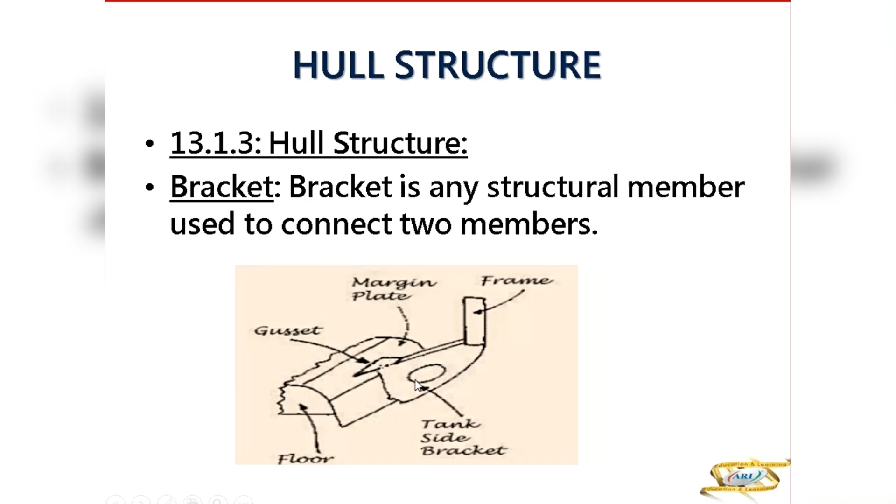Good afternoon, sir. So bracket we have seen, bracket was connecting to frame, so any structural member used to connect two members. Here you had a margin plate, I showed you the yellow one connected to the floor. Here you have your tank side bracket, which is connected to frame. Then you have frames - we have seen on the side, the web frame was the yellow one, the red one was the frame, the bracket, the shell plating, the beam knee here.

Frames are like ribs bolted or welded to the keel to support the hull and give the ship strength and shape. So the frame resists water pressure stress because the water pressure stress is from outside, onto the hull plating. If there was no frame, the inner structure of the ship would not be protected from water pressure.

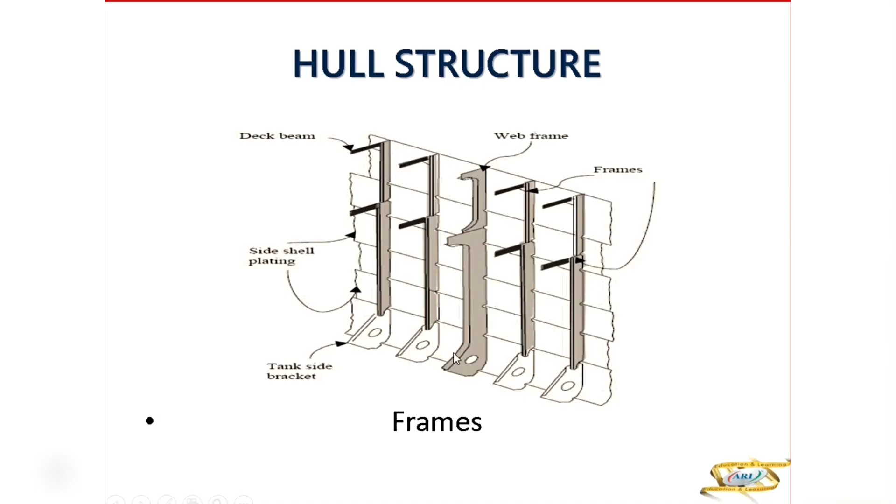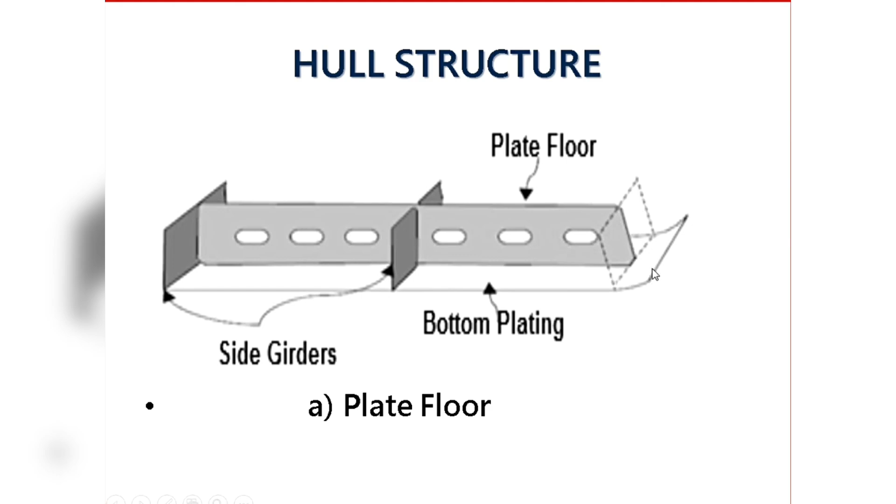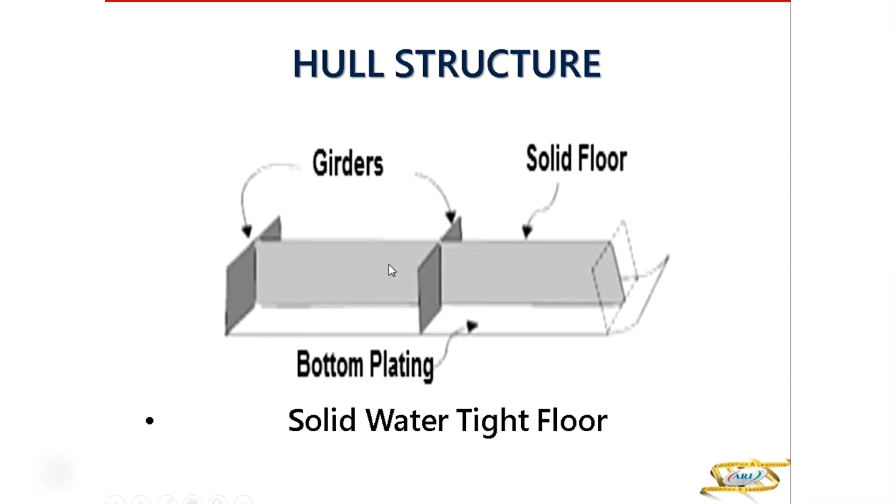We have floors. The floors we have seen - this was the plate floor with the holes, this was the center girder and this intercostal side girder. This is the margin plate, this is the bilge plating, this is the bottom plating. This is solid plate floor. This is the red one we have seen, which is a watertight plate floor. This is centerline girder, intercostal side girder, margin plate, bilge plate. This is between the tank boundaries, DB tank boundaries. The bottom plating here, the bracket floor.

In the video, we had not seen this frame. At the centerline, there was a bracket here, and on this side there was a bracket here. Both are connected by a framing, the frame bars, top and bottom. So this is your intercostal side girder, and there is a stiffener here. In between the frame bars, you have like an angle strut. I'll show you later. Here the plate is bent 90 degrees, that is flanging. The bracket floor is bent at 90 degrees here to take the load of your tank top, providing additional strength.

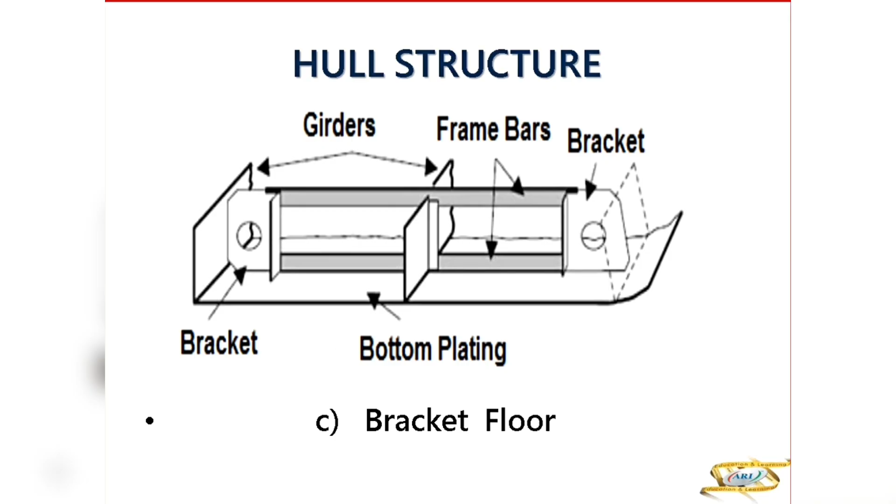Flanging - if you are bending it, why not welding it? Because if you weld it, it can break. By bending it, the strength will remain. That's why we bend it at 90 degrees.

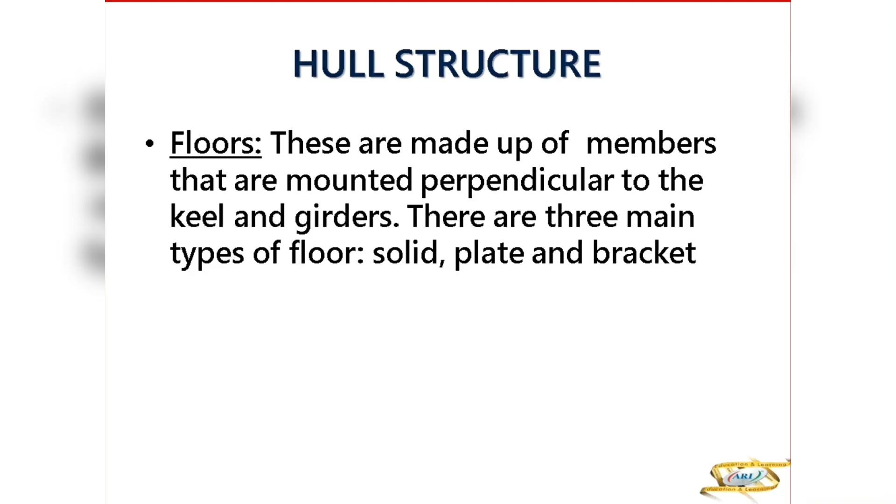So floors are members mounted perpendicular to the keel and girder, located in the double bottom tank. You have three types: solid floor, plate floor, and bracket floor. Solid floor is between two DB tanks. Solid plate floor is in the DB tank - watertight plate floor, so mark it solid, watertight. So the types of plate floor will be solid watertight, solid non-watertight, and bracket floor. Solid watertight will be between the tanks, the DB tanks. Non-watertight will be inside one DB tank, the ones with the holes. The bracket floors are in between the solid plate floors.

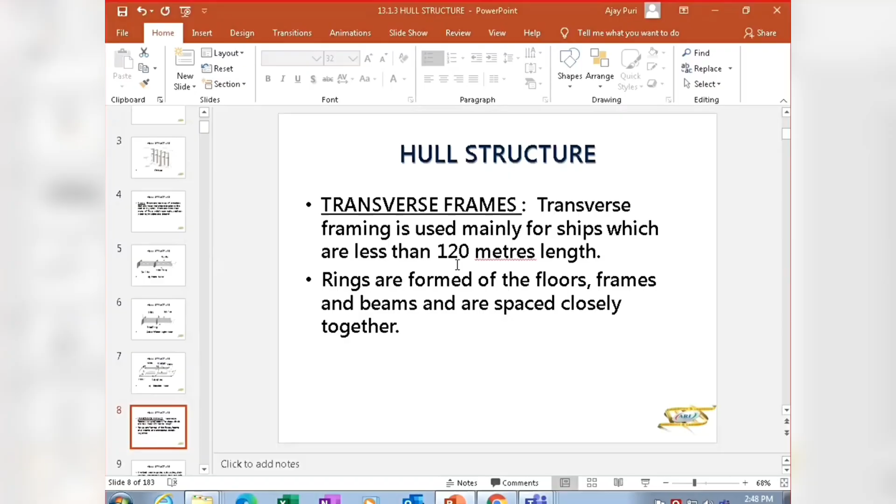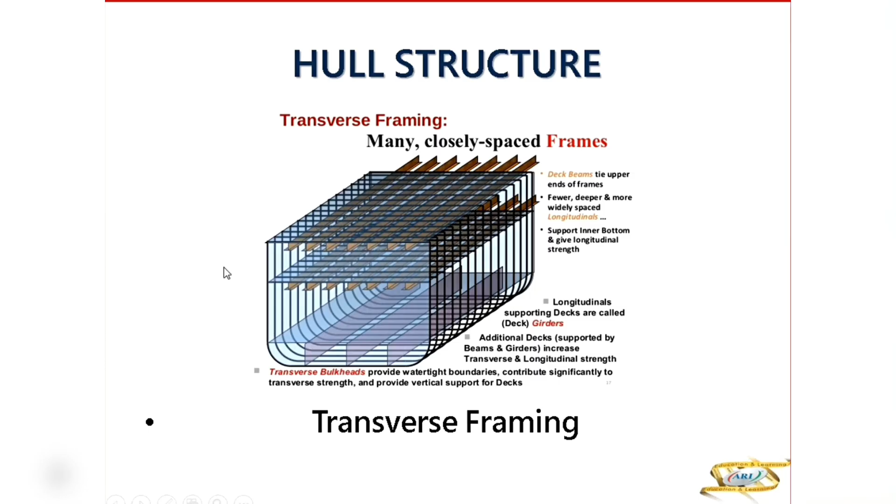First we will see what is transverse framing. Transverse framing is used on small ships which are less than 120 meters. Let me show you other diagrams also of this. Now this ship is transversely framed because you don't find longitudinals - you have girders, but no longitudinals. So these are tween deck girders, bottom girders. These are your frames connected to each other here. This is a bottom transverse, deck transverse.

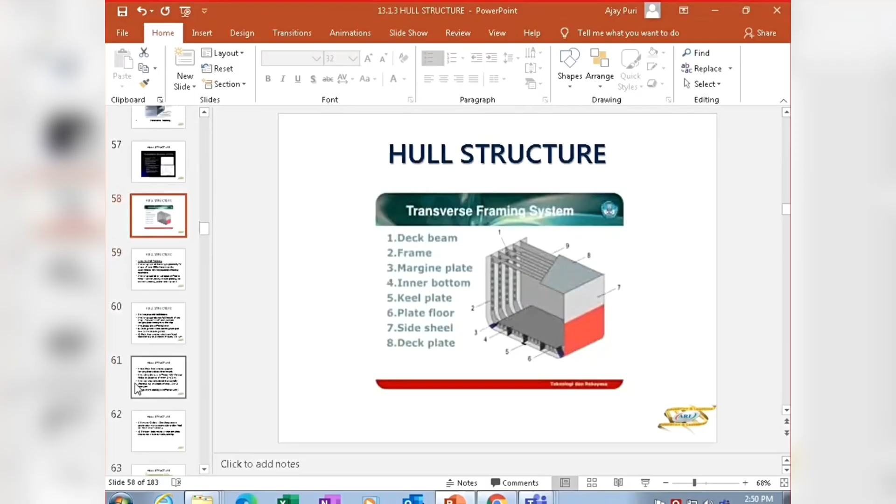So this is the transverse framing without longitudinals. We'll do that in detail afterwards. So this is your transverse framing - we'll be covering it in detail later. Right now we're just doing the definition, then we'll do the detail of transverse framing.

In this diagram, if you see, this is transversely framed - no longitudinals. There's beams here, tween deck beams, and then you have floors here and the girder, no longitudinal. This plating on the side is the stringer plate - if you can see the arrow, this is the stringer plate. We'll come to the definition later. So transverse framing is usually used on ships less than 120 meters in length. Rings are formed of the floor, frames and beams, and they are spaced closely together, all connected like a ring as I've shown you.

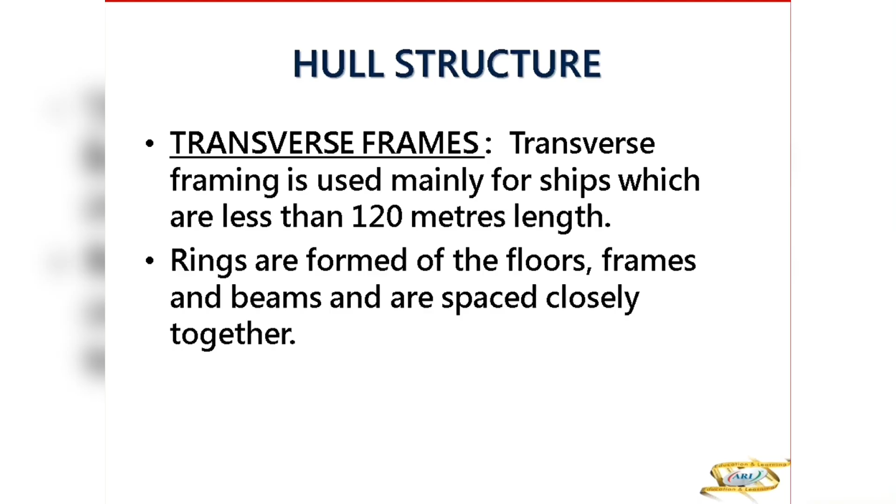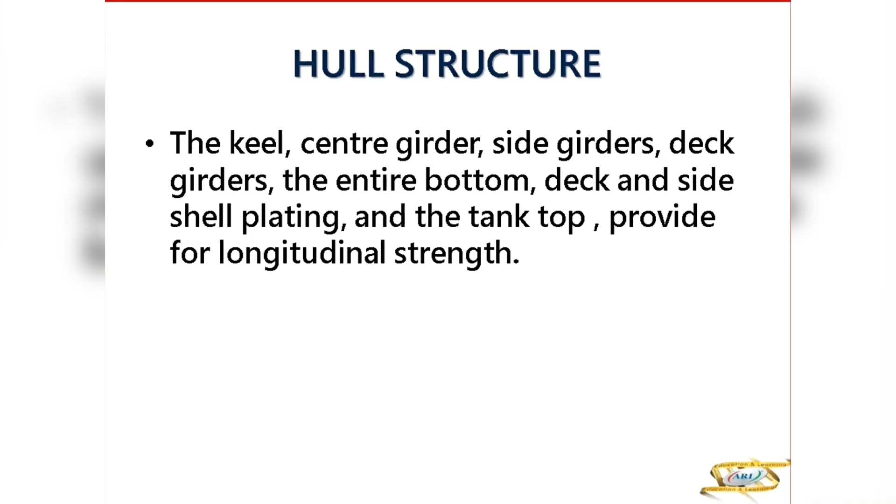That your deck transverse, bottom transverse, frame, everything is connected like a ring. Now the longitudinal strength is provided by the keel, the center girder, side girder, deck girder, entire bottom, deck and side plating, tank top. But you don't have longitudinals providing the longitudinal strength.

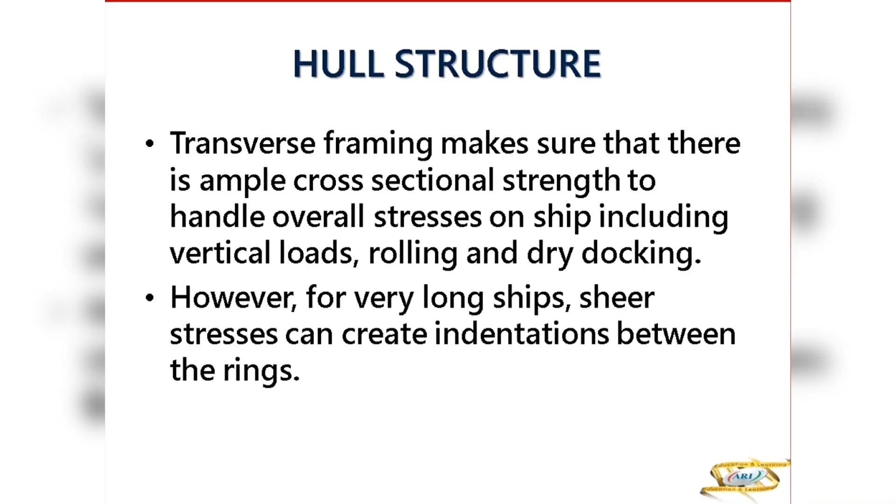Now the thing is, these are not very long, these are small ships, so they can take the vertical load, rolling and dry docking stresses. But if your ship is very long, then you can have indentation between rings. Indentation means the plating will go inside, it will make a dent. So you can't afford to have dents on the ship if your ship is too long. So you can't have transverse framing on long ships. Below 120 meters you can have that, but beyond that length you can't have transverse framing.

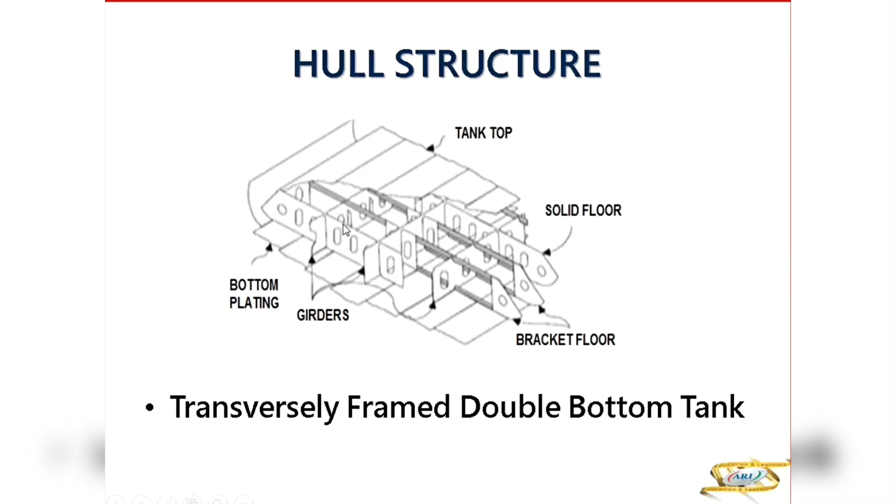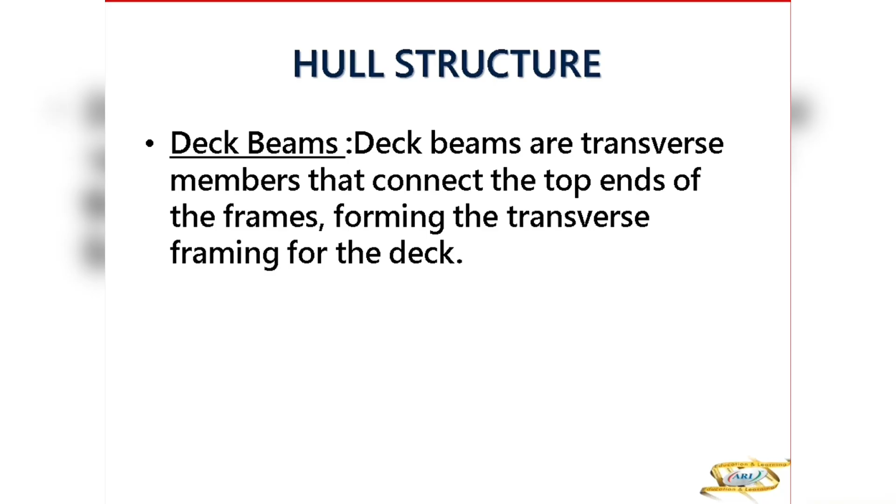Now we come to deck beams. So deck beams we have seen in the video. They are transverse members that are connecting the top ends of the frame, forming the transverse framing of the deck. So deck beams are supporting the deck plating. So these are thwartship members which connect to your frames on both sides, and you have a beam knee connection between the beam, deck beam, and the frame. So that is your deck beam which are going athwartships.

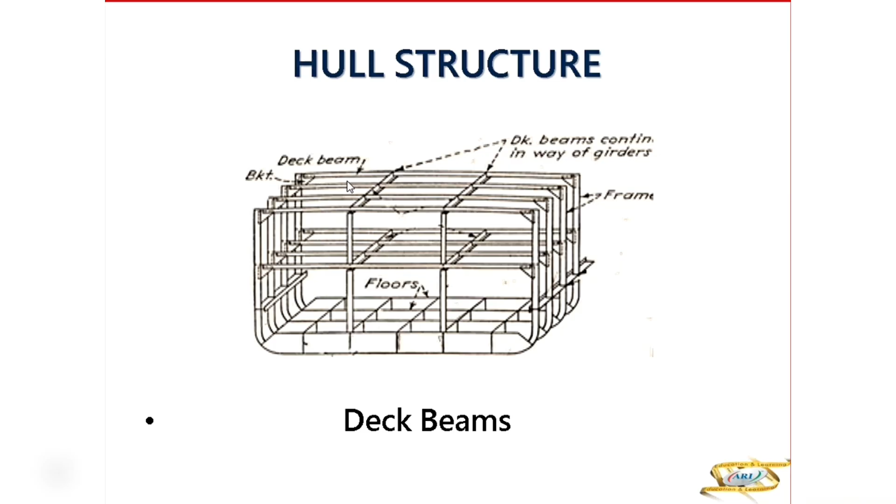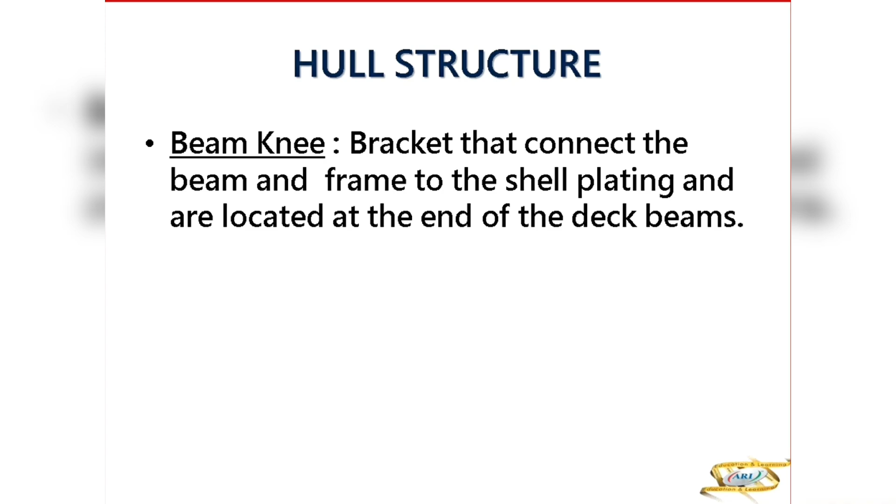Now we'll come to beam knee. This we have studied earlier in the stresses. So beam knee are connected between the beam and the frame, and they compensate for your racking stress. So it is actually a bracket, but there the position of this bracket is known as beam knee. So it is a bracket that connects your beam and frame to the shell plating and is located at the end of deck beams. So this is your beam knee.

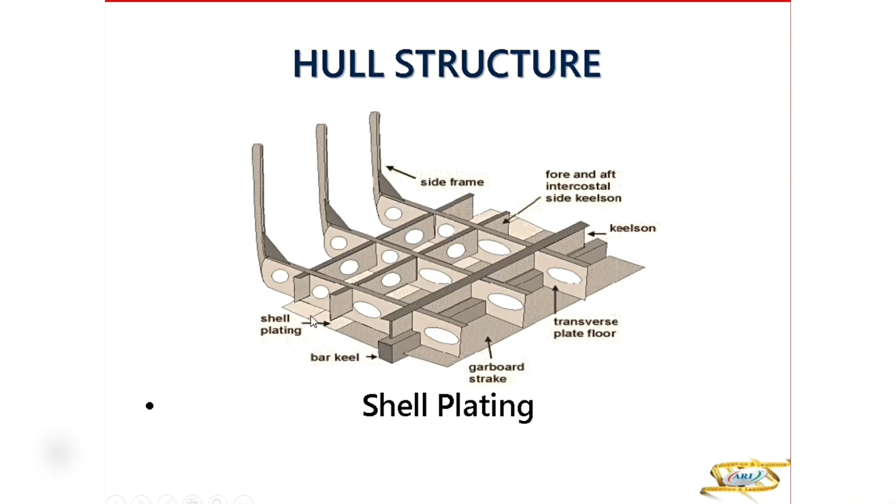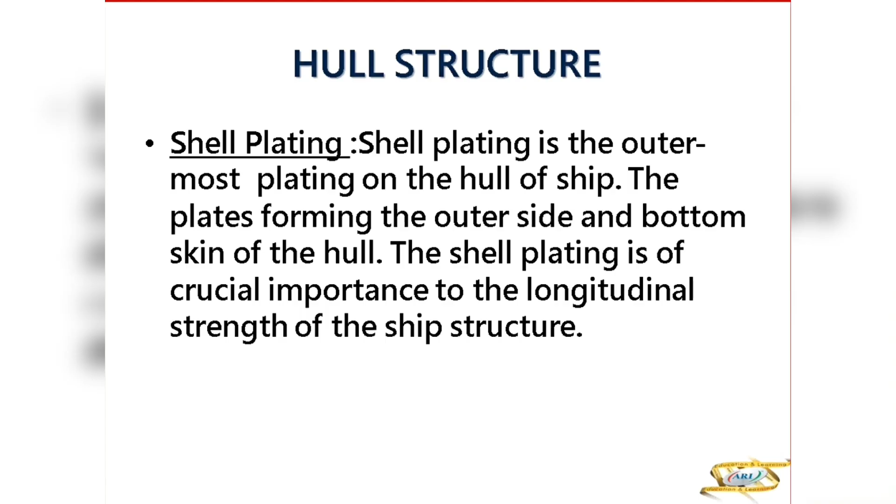So the plate outside is known as shell plating. The plate will be outside your frame also. So shell plating or hull plating is the outermost plating of the hull of the ship. They form the outer skin and the bottom skin of the hull. It is crucial for the longitudinal strength of the ship's structure.

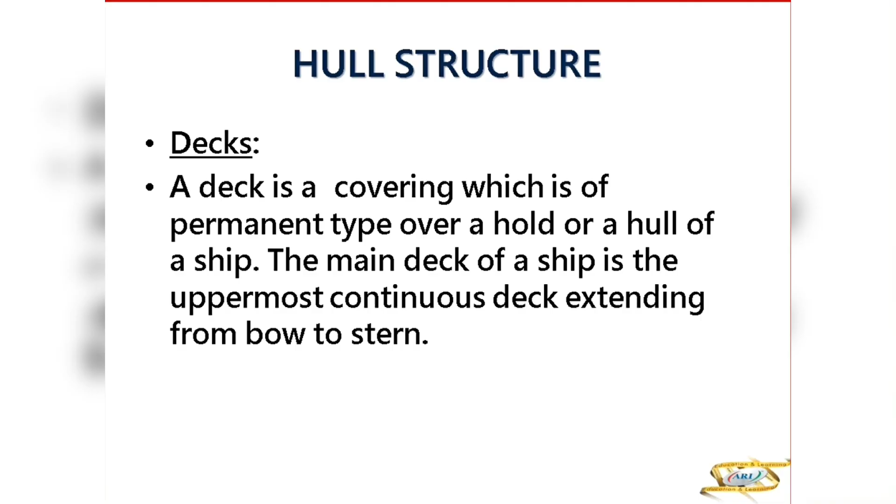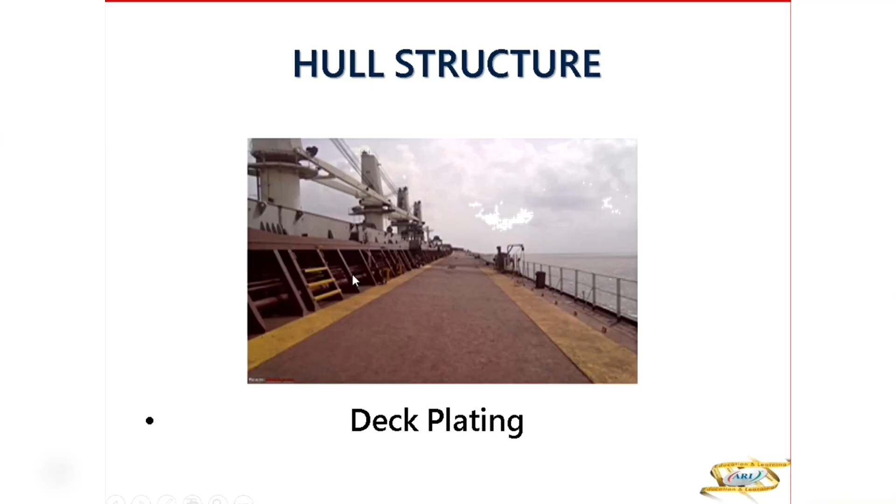Now we come to deck. You know about it, so we'll come to the definitions. Covering which is permanent type over a hold or hull. Main deck is uppermost continuous deck extending from bow to stern. So this is your main deck. This is a bulk carrier which has the hatches here, and the hatch coamings are here which support the hatch cover, and the coamings are supported by these structures, the supports here. These are your cranes with the grabs for discharging bulk cargo.

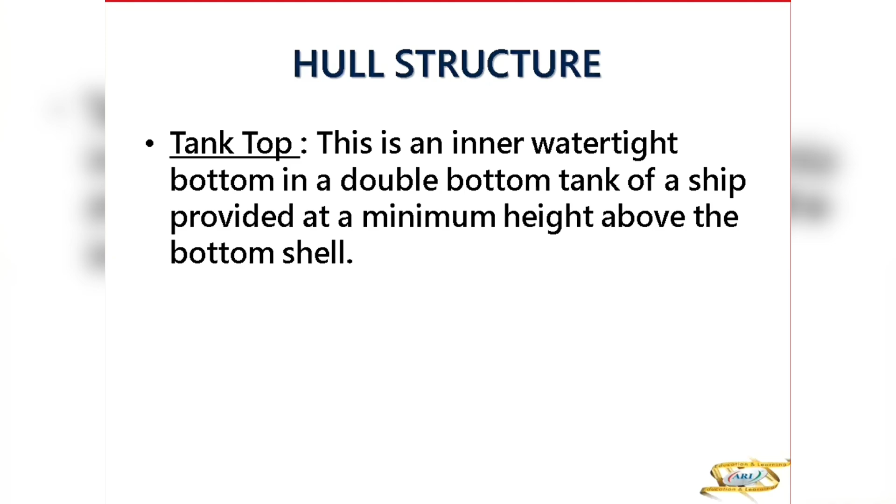Now we come to the stringer. Now this is a double hull VLCC. This is the double hull here, double bottom, centerline girder. And the stiffeners here for the transverse bulkhead, and then you have stringer plates here. Plates where you can stand as a platform. It's not for a platform purpose, but this is providing strength.

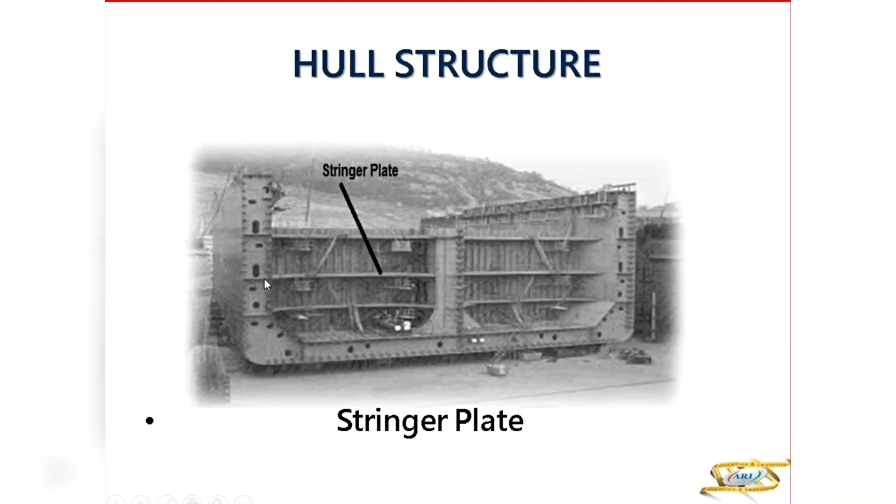When it is across, port to starboard, it is giving transverse strength. When it is going fore and aft, like this one in your passageway, in the double hull, there it is providing longitudinal strength. So here in the passageway in the double hull, it is providing longitudinal strength, but on your bulkhead, transverse bulkhead, it is giving transverse strength. Here it is giving longitudinal strength. So it is a longitudinal structure plate. If it is giving longitudinal strength, then it is a longitudinal structure plate which strengthens the hull of a vessel.

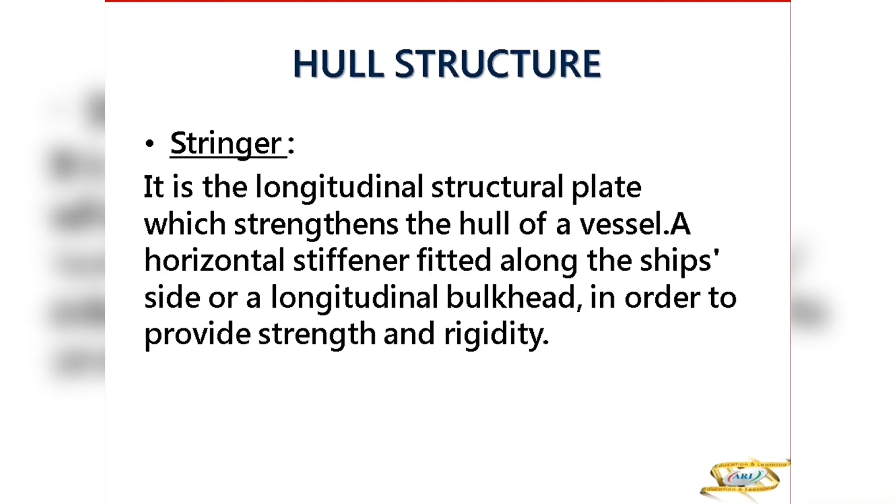A horizontal stiffener fitted along the ship's side or longitudinal bulkhead to provide strength and rigidity is a stringer plate. Now to explain, I'll show you again how the stringer is there.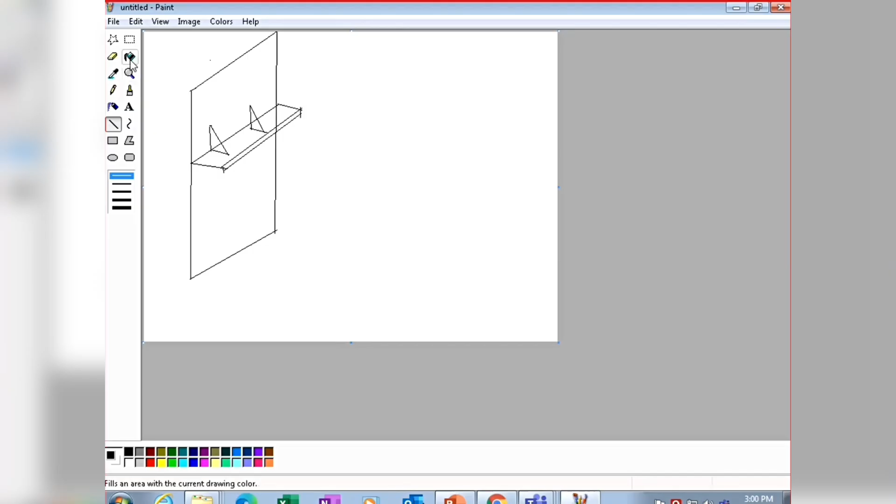So if I mark it out, what is the stringer plate? I'll mark it with color first. Suppose this is your longitudinal bulkhead. Now I'll come to what is stringer plate - this is your tripping bracket, and now the stringer plate, marked with yellow color. So this is your stringer plate. Then the stringer plate will have a face plate, which is this one. So this is your face plate, your stringer plate, and your tripping bracket, giving you longitudinal strength.

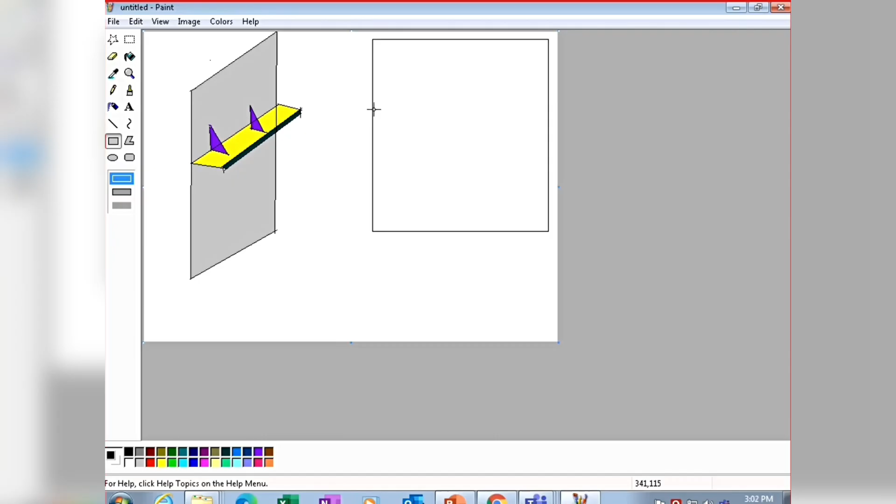Now a stringer plate can also be giving transverse strength. How it will give, I'll show you that way. So this is your transverse bulkhead going from port to starboard. Here you can have a stringer plate also, which is going across. So this is the tripping bracket, this is the face plate, and the tripping bracket here will be like this. So these are your tripping brackets, this becomes your face plate, and this becomes your horizontal stringer. This is basically transverse horizontal stringer, and this is longitudinal horizontal stringer.

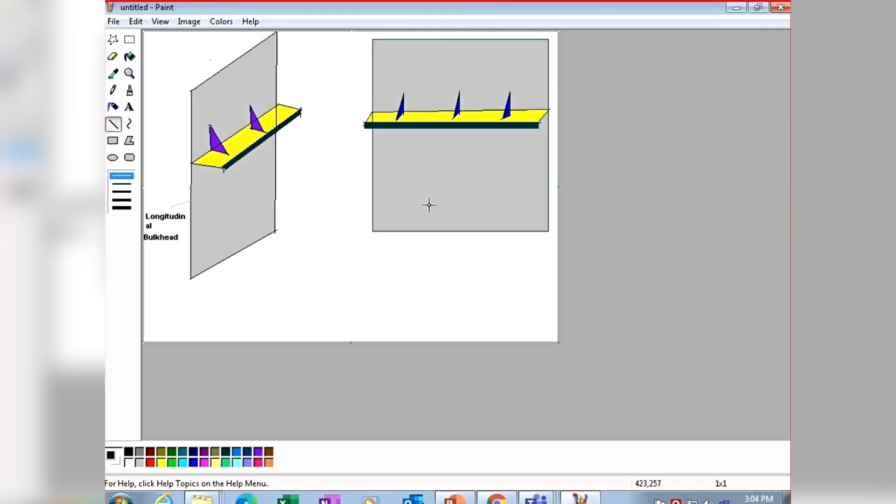So these are the two stringers. I'll mark it out so that it becomes easier to understand. So this is your longitudinal bulkhead, and this one is your transverse bulkhead. This is your stringer plate providing longitudinal strength. And this one is your tripping bracket, so here you are going to have your tripping bracket.

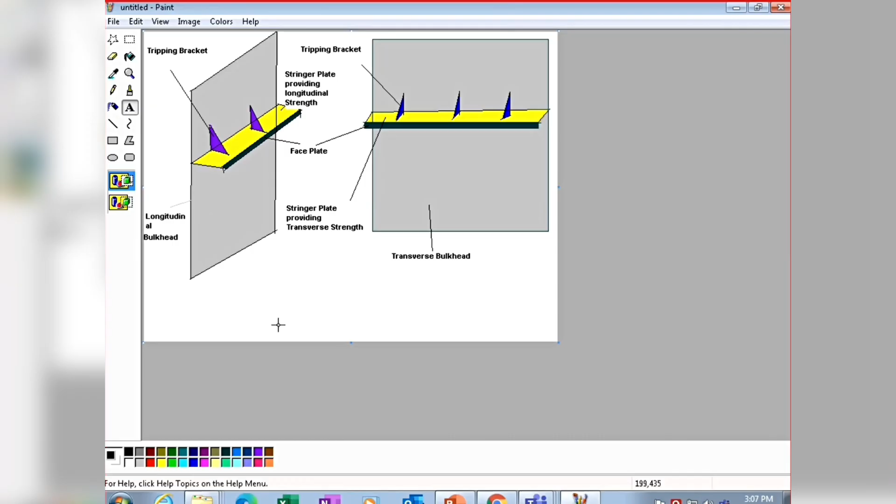So this is a stringer plate providing transverse strength. Here again is your face plate, similarly here is a face plate. I'll mark it together here so I don't have to do separate labeling. And then this is your tripping bracket. So here are the details of stringer plates - what are stringer plates, diagram. A stringer is a longitudinal structural plate.

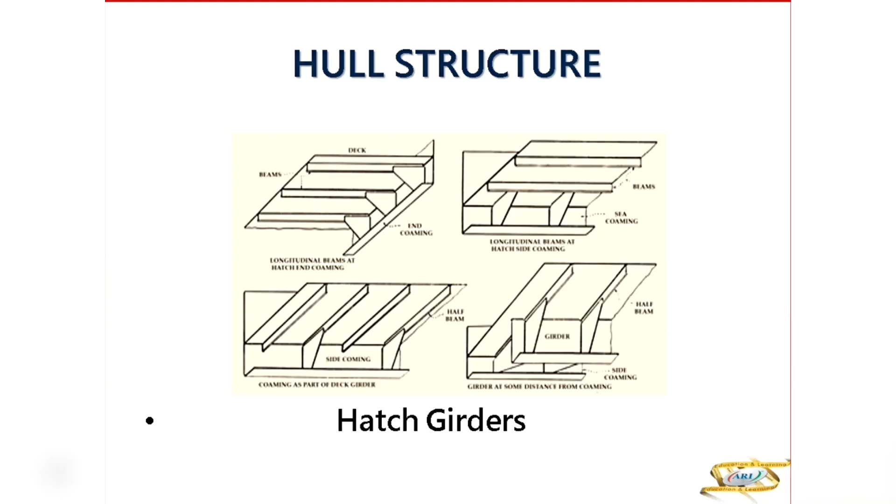So hatch girders are longitudinal main structures in hatch that support the vertical loads.